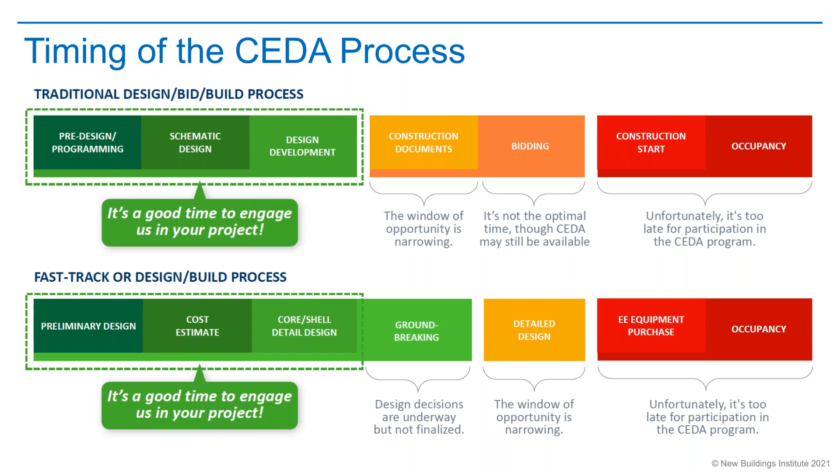The process, we've made this in conjunction with the utilities a very simple process. The enrollment is an online application. You fill out some particulars about your project. It takes maybe 5 to 10 minutes to submit an application. We'll review the data, we'll review the building characteristics, and once we have all that data, we'll get it approved for the program. Once approved, we're going to assign a project manager who will reach out and start step number 2.

That's a preliminary analysis. And during this first meeting, which is roughly an hour and a half long, we're going to do some real-time evaluation of different measures and what we call bundle selections. Basically, the potential for whole building strategies for further analysis. So we'll start that process of evaluating what measures we should consider. Then we'll move to the third step. Again, another hour and a half long meeting.

During this process is where we're going to make final decisions, determine strategies that best align with your goals. Projected energy savings, and of course the utility incentive, will all be determined at this final analysis, and then this is what the project will in fact design to.

After step 3, from an owner or owner-developer standpoint, architect even, we pretty much go into construction, and then our team will come in after occupancy and do a verification just to confirm that what was planned was in fact installed into the project, and then we'll report that back to the utility, and then the incentive will be issued for strategies that were implemented. So it's really a very simple process.

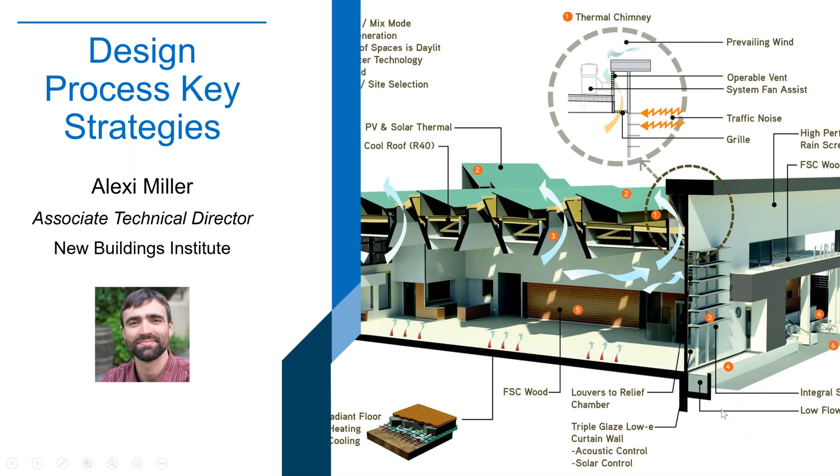All right, so I would like to give you a little overview of some of the key strategies that we at New Buildings Institute and our partners have found to be particularly important over the years. We've been looking at zero net energy buildings or other high performance building types, as well as a wide variety of other buildings, from very high performance like zero net energy all the way down to much more straightforward buildings, some that in fact don't do any energy modeling at all, and have found that there's a couple points in the design process that are leverage points. And we found actually energy modeling is a really powerful tool for improving building energy performance. And there are some basics on making sure that potential is realized.

So a couple of the key benefits: one is getting a holistic representation of building energy use. So thinking about where energy goes in the building and what you get out of that building. And basically doing the energy modeling, especially if done early, like Jeff mentioned, never too early, right? There is, of course, too crazy early to do energy modeling. That is such a thing, like what is the building we're going to build? We have no idea. But pretty early in the game, you can start getting some ideas about what kind of systems you might put in.

And you can start thinking about where the building goes on the site, massing, maybe HVAC type selections. It can help inform some pretty early stage decisions that then allow you to make more informed decisions about the more detailed pieces, the fine tuning farther down the road. And the point overall is to keep the energy costs, the operational energy usage in terms of cost, and the impacts in terms of things like greenhouse gases minimized over the life of the building.

So when we talk about using energy modeling as a design tool, we've thought of there being a few kind of early stages in the project. A couple of things we've found to be really important at these particular stages. One, right at the beginning, is setting an energy target, and often that's something like an EUI, an energy use intensity, kBTU per square foot, in the documents like the owner's project requirements. That target then can help inform the energy modeling. And by the way, we have lots of good EUI targets available, zero energy and otherwise, for both new and existing buildings. So if you're wondering what that might be, we have resources on that.

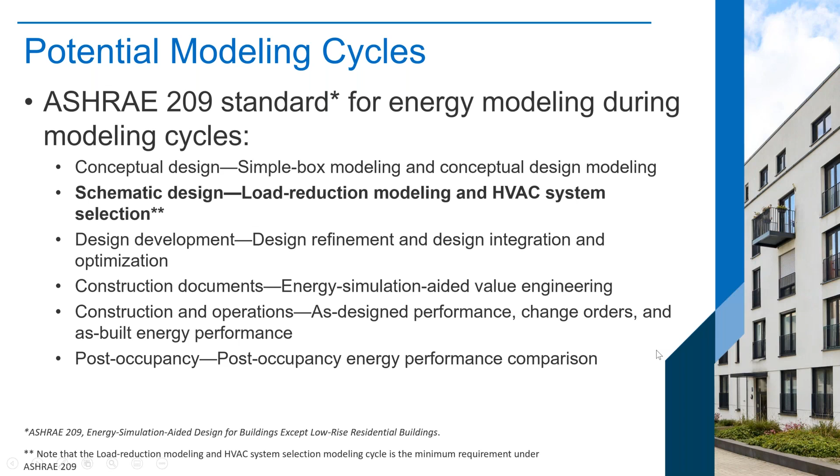And then of course, you build the building, confirm, and are eligible for the incentives coming down the road. There are several standards. ASHRAE 209 is a pretty good standard for energy modeling. It's quite detailed. If you're going through the CEDA program and you're trying to use this complementary energy modeling, you may not need to know all the details of ASHRAE 209, but I wanted to throw it in here to show that you've got several components of that standard that talk about the use cases or the applications of modeling throughout. But there's a lot on there, and I'm not going to read that whole slide.

I mentioned setting targets early in the project. So whether that is in energy usage as an EUI target, or whether that's an emissions target denominated in greenhouse gas, either way, it's quite important to set that target early. And we've found a lot of projects have been able to achieve high performance, zero net energy, or just generally significantly better performance, in part because they set a target early and they got buy-in from key team members and kind of stuck to that target. And then there's also the potential to think about system level targets for efficiency at the component level or at the end use level.

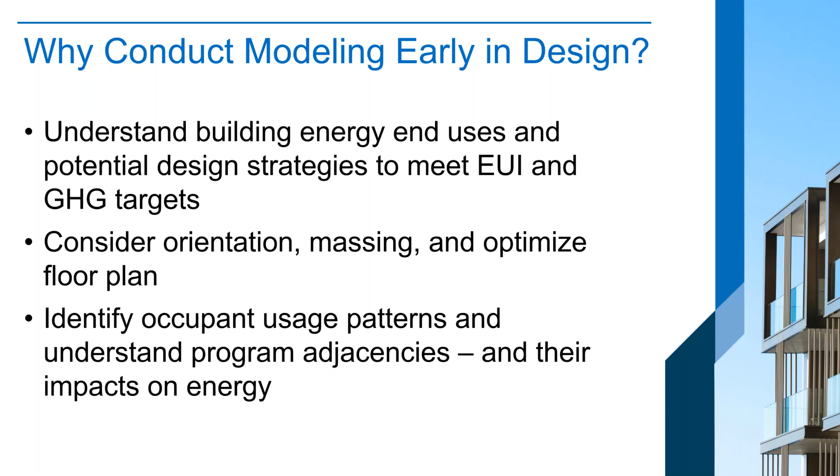Having conducted those, then you can do this energy modeling, and doing it early in design. I mentioned this at the beginning, but you can think about things like orientation of the building, the massing, try to optimize that floor plan, and then think about things like adjacencies. So is there a corridor next to a use space, and are there energy flows between those two areas? Is there a key energy consideration related to how you're laying out the building? And then is there some impact from that on what you're putting in the building, whether that's mechanical systems or envelope? Some of the answers to those questions can start to shake out from even some of this preliminary early modeling.

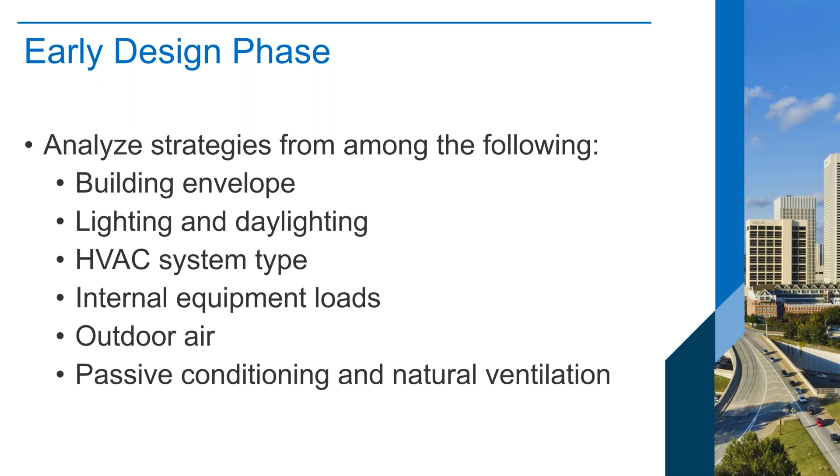Some of the strategies that we've found are important to think about are listed here. I'm not going to read all of them, but I want to note that these include what you might call passive and active strategies. Passive stuff like insulation or natural ventilation, active strategies like things with motors, right? HVAC, pumps, lights, controls. So those can be considered and compared baseline to proposed, as well as compared among each other in a holistic sense. That's part of the game of this holistic energy modeling idea, to be able to think about the contribution that each of those components makes to the overall performance of the building and its energy use. And then we've got ongoing design.

Let's think about those packages that were thrown out there, choose specific measures or final packages, and do that fine tuning. Often teams do iterative energy modeling to really get this stuff nailed down. And then of course it can help inform the handoff for the building operator.

So we have some idea how all the pieces are supposed to run, and that helps make sure that the building actually can live up to its potential. We modeled a great building, now let's operate it and get a great building, operate it as it should be done. And finally, within this program and in general, there's a final step of verification, and of course on to the incentive. And I think we're skipping that today.

So Connie, if you have it, Farah, our guest presenter today, Farah had a project emergency and she is on site putting out metaphorical fires. So she pre-recorded this little chat for us.

Hello, my name is Farah Fazaneh. I'm the Director of Facility Planning, Emergency Management, and Construction at San Bernardino Community College District. At San Bernardino Community College District, we have established a set of goals that include zero net energy buildings, LEED Gold or higher certification, as well as low EUI targets. We currently have a lot of construction activities happening in the district with upwards of 15 new construction or major renovation projects in the pipeline.

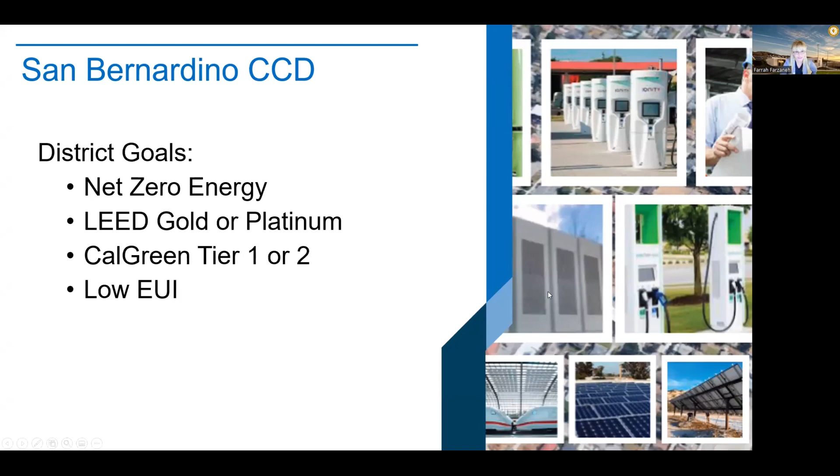We want to ensure that our buildings are planned and ready for the future. Energy modeling plays an important role in this effort. Remember the old saying, if you don't measure it, you can't manage it. Therefore, we don't want to see energy modeling used only as a check mark. We actually ensure that a lot of our decisions are driven by the information collected through the energy model simulations.

It allows architects to virtually experiment and evaluate different scenarios to allow us to weigh the benefits of different options. It allows us to take a measured risk by providing us information about energy efficiency measures that are not yet widely adopted. To name a few recent examples, we have decided to implement solar chimney, solar glass, DC-DC distribution, and phase change material for our technical buildings. So remember, energy modeling allows us to push the envelope with little to no risk. So take advantage of this great tool. Thank you.

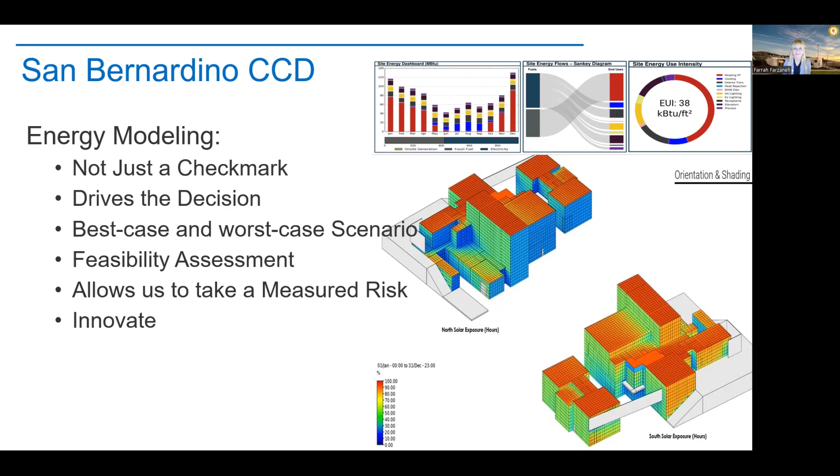Great, thank you. Thanks, Farrah in absentia. I believe she's going to be able to join for the Q&A, assuming that the fires are not raging metaphorically at her project site right now. Now we're going to hear from Neil, who is an expert modeler and runs Redcar Analytics. Neil? Yeah. Can you hear me? We got you. I think, let's see if I can move our slides along here.

So, hi everyone, my name is Neil Bolger. For those of you that don't know me, I've been in the realm of energy modeling and design consulting for a little over 12 years now. And today I'm going to just try and share briefly a few touch points on how we have worked doing building design enhancements with energy modeling, and where I can provide my experience and maybe some ideas that can inspire others as they're working with teams, or even if you are on the owner's side, how you might best work with an energy modeler and your whole design team.

So in the theme of today's meeting, I really focused on thinking about the value an energy model can bring to a design in the perspective of what different teams might be focused on. You know, all teams might be focused on a low energy building. That is a goal we all share. And I think the success I've had is to think about clients and realize that while everyone wants the best building under the sun, and everyone has the same general list of maybe 15 goals, some goals kind of float to the top based on who those clients are.

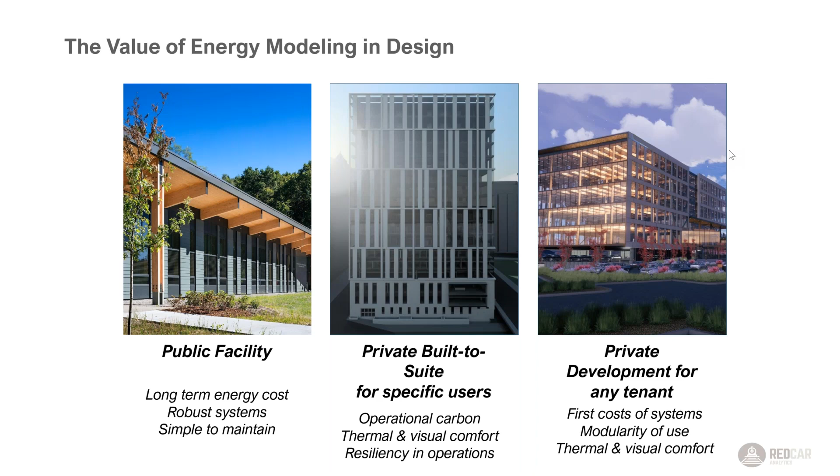And I think being aware of those goals can really help an energy modeler be successful to sort of pull the right information out of an energy model for a team to make informed choices in ways that we know they're already having conversations together. So I was just going to share a few examples of this, and sort of before I dive into that, kind of speaking to the challenge of energy modeling.

You know, from early design all the way to making the building, we're surrounded by lots and lots of ideas, and there's this struggle of how do we analyze all the ideas that are being thrown at us? Like, what is even the right approach? And I need to build an energy model, but which energy model? And does it need to be an energy model? Are they asking me questions that might be around daylight or comfort? And I might need a different model.

So an idea I always preach is to really think about the deliverable, and even think about what is it we need to answer first, and really figure out, is there a meeting that's in 3 days and I need to help answer a question, or do we need to come up with something in 2 weeks? And letting that flow all the way through, really setting the tone for, well, what is the model I'm building? How accurate does it need to be? How much information am I being asked to bring to the table? Do they want a 20-page explanation of what I'm doing? Do they want 5 words about what the EUI is?

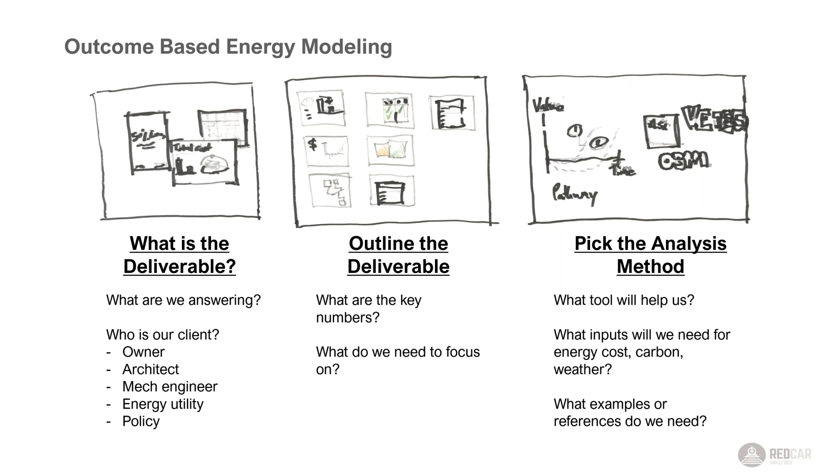And for us, that's really been our way to then say, great, well, at this instance in the project's design, this is the analysis method we're going to use. Or maybe we decide on this instance, we're going to make a few simple models before we dive into the full building, because they haven't even figured out the massing yet.

So, taking that into consideration, there's lots of tools out here. People can use these tools. I've just thrown a few on the page. Some of these tools are more optimized for different stages of a design. You could use them in any stage, but sometimes even switching between tools, as crazy as it can feel, if done the right way and really thinking with the design team's best motivations in mind, can be a way to actually be successful in helping clients really, at the end of the day, understand what's the relationship between how they're designing the building and what it's going to use in energy and feel, and being that sort of building translator.

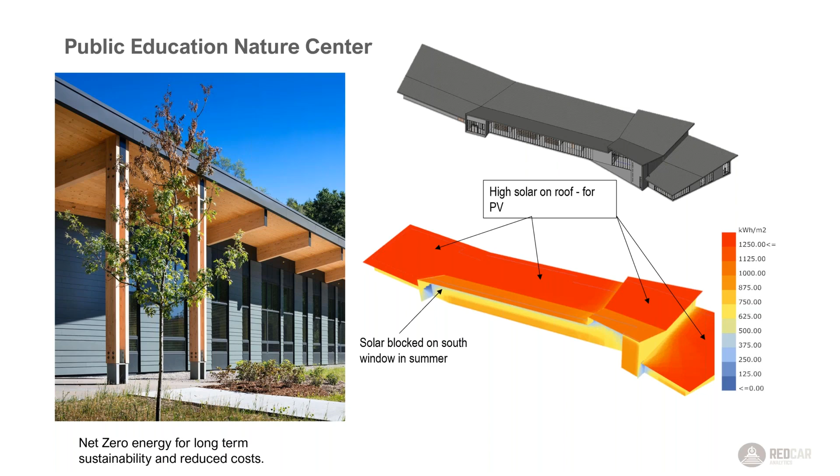So some examples I'm just going to share. This is my public building. This is a public education nature center. It was a really beautiful little building that was going to be these indoor-outdoor classrooms, and for them, they really wanted to hit net zero energy, really make a building that was robust, easy to operate for the staff that were going to be there. So from day one, they wanted to set a goal for solar generation and how can we position that building to maximize output.

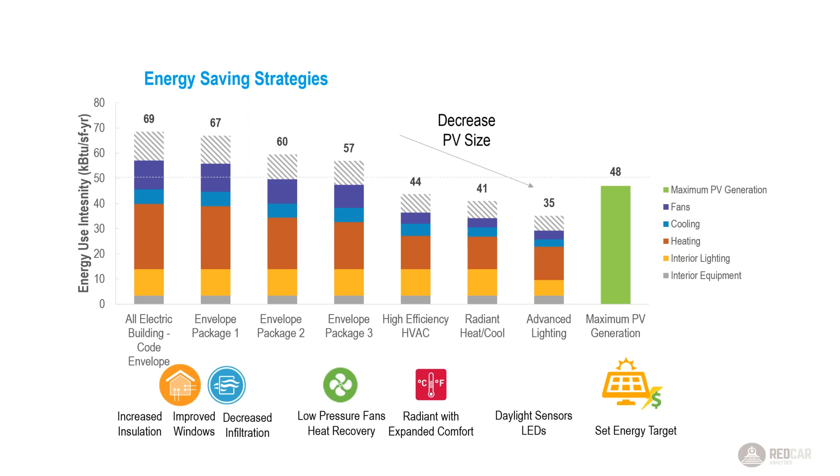The other fun challenge there, it was in a climate that snows, so the solar output wasn't the most, and it also gets very cold. So a big piece that we even helped do, and this was actually with a shoebox tool that's online, was helping them figure out that, while we might want to buy really high performance windows to bring the energy down, it will also make the building more comfortable and less drafty when you have a classroom with students sitting next to the glass or pretty close to the glass. You can really have an impact.

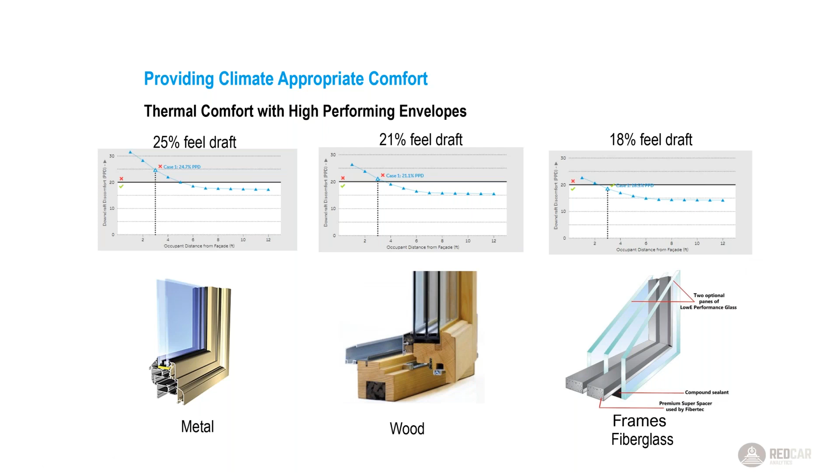My other example on a core and shell office building: for this project, again, we have an EUI target we're really focused on, but here we dove into the fact that at the stage we were pulled in at, we really wanted to help express that improvements to the envelope could also mean improvements to usable space in the building. And while the building may have a certain aesthetic goal in mind, there's these glare risks and comfort risks where too much glass can actually inhibit how flexible part of the floor might be.

And while that might end up being where we want to be in a building, we also just want to go into things eyes wide open, right? If a client wanted to move into this building and put people all the way up against the west facade, how challenging is that going to be? And if we make that more comfortable, how can that give them that other goal they might have, flexibility in the building they're creating.

So kind of using both, right? Knowing an EUI target, knowing we have to get there, but then knowing people don't always just think in bar charts and need to be able to relate to the model in other ways. For this project, we also focused on bringing pictures and examples from other buildings so they could understand how other projects that did decide to do more glass, for instance, created a buffer space, created a corridor, which is a great way to go in a building if you have the flexibility to do that.

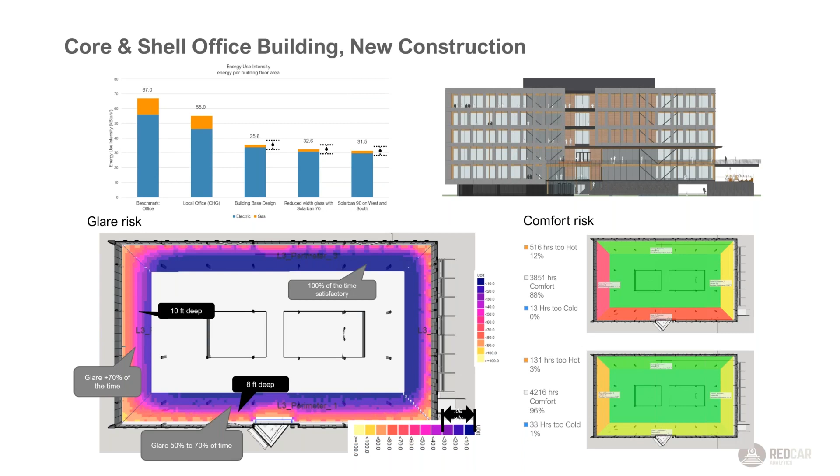So a lot of times we'll try and couple an energy modeling analysis, a visual chart, with real pictures of how that would look in reality as a way to better translate what we're talking about to clients. The last example on this core and shell building I'll throw in there is speaking to the value of an energy model; it can pull out a lot of great information.

And early on, we realized that our model is one of the only things in the design team that can look at peak loads, air conditioning loads on a certain side of the building, and really working with the engineer to say, well, this is what the model says. We know you're going to make a final load calculation perhaps later in the phase, but for choices today, how can we turn that from engineering numbers into things the whole team can understand?

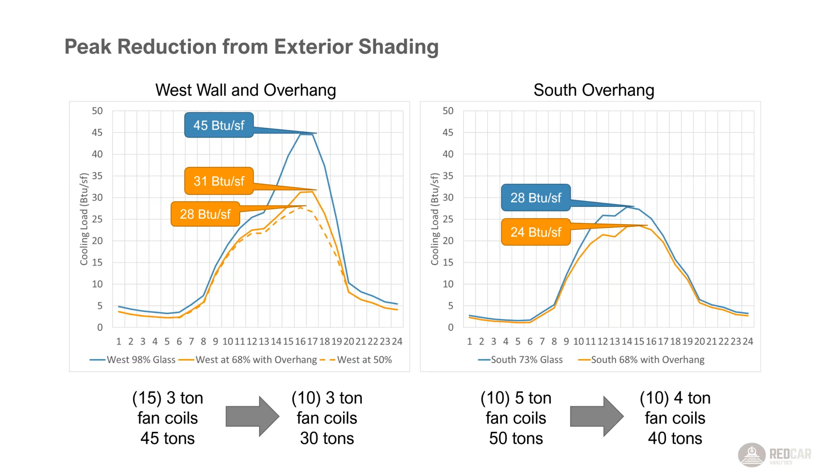So we quickly translated this reduction in glass into how many fan coils we could delete out of the building. If we went from this much glass to this much glass, could we drop 15 tons on the west side? And what does that look like in terms of moving dollars around our design? So again, just trying to take the best value we can out of our simple models to put it into numbers that people can digest and take action with. So lots of uses, but happy to be here.

Thanks, Neil. Pretty cool stuff. Making buildings better in terms of energy and outcomes for the people that sit in those buildings. And now we've got Rich to talk a bit about how CEDA does modeling, what goes in, what comes out, and how that works potentially for your project.

All right, thanks, Alexi. Just a quick introduction for the folks I haven't worked with before. My name is Rich Pesky. I am an energy project manager with Willdan. My background is in architecture. I practiced architecture in the Twin Cities in Minnesota for many years before jumping feet first into the energy field, so I've been with Willdan doing energy work for about 7 years now. I wanted to take a few minutes here, see if I can get the slides to advance. There we go.

All right, so I'm going to take a few minutes to talk about getting the most from energy models, specifically through the CEDA process that Jeff framed up earlier, but a lot of this is going to apply anywhere. And I'll start with why we build models in the first place. Neil and Alexi have already touched on some of this, making sure that the modeling adds value to a project. As long as the inputs are good, there's a lot you can get out of it, and what that is can change depending on what you're looking for.

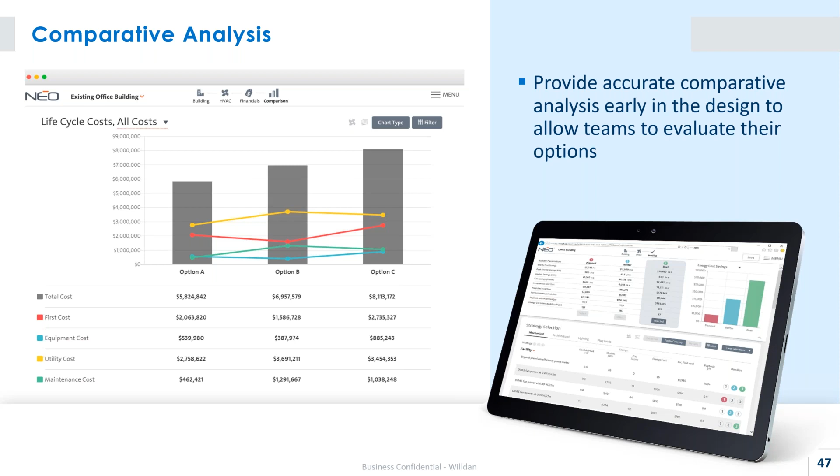We do have to be realistic and consider that if a project is far enough along that there aren't any options on the table, in other words, if the design is fully baked, the utilities and the Public Utilities Commission, they'd weigh that against the goals of the program, again, driving energy savings where they didn't already exist, decarbonization and so on. In the end, CEDA was designed to move projects further than they might have gone otherwise, to incentivize added efficiencies, and not just to reward what would have already happened. And that balance, incentivizing or rewarding, I'm sure I could talk about that for another hour at least, but the key there is whether the program is moving the needle, and projects that still have opportunities to go further can capture some of those incentives.

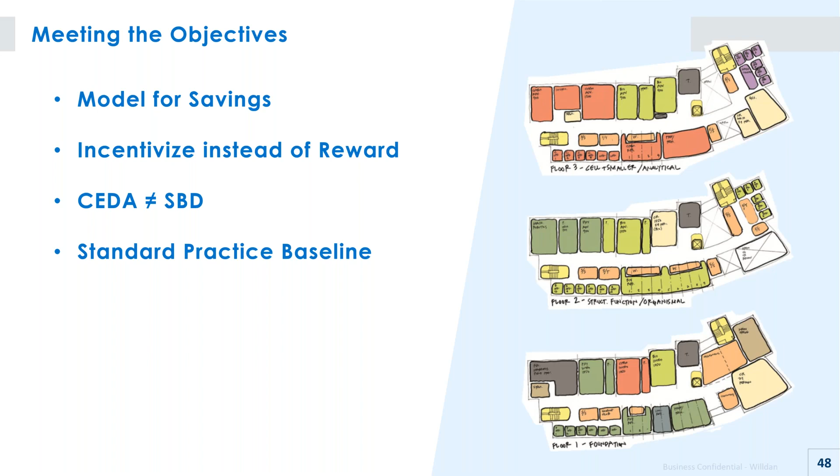So then thinking about the actual savings opportunities, what are we looking at for projects? So we can really take a look at anything under the roof and see where the potential is. Some of the areas where we're seeing increased opportunities and ones that support the goals of electrification are things like heat pump water heating, overall system switches to all electric, like with VRF systems, maybe heat recovery chillers in larger projects. But really, if something in a building uses energy or retains energy, thinking about the envelope here, we can take a look and see whether it fits into the mix.

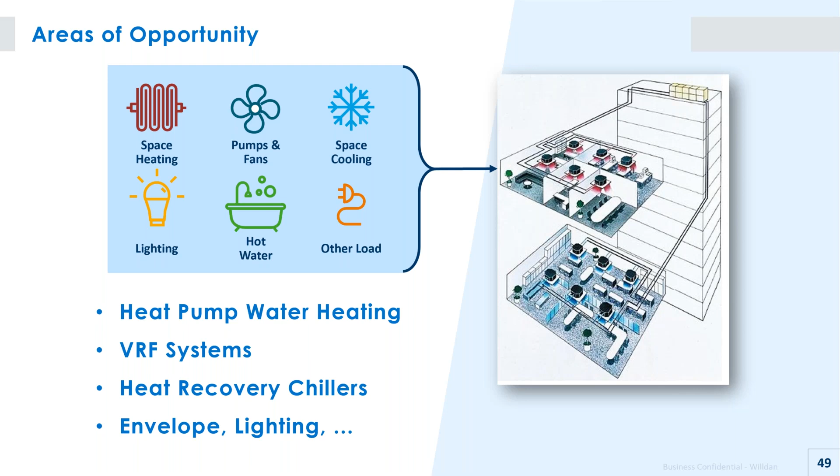So we're talking about a lot of things that happen during the design process, but eventually the project gets built, and we'll want to take a look and see how things shaped up. Of course, recognizing that occasionally something in scope might change along the way. Yeah, that never happens, right? But just in case, after the construction wraps up, we'll review the as-builts and visit the project site to see if anything's changed with any of the planned energy efficiency measures. And with that, we'll true up the energy models and resubmit for final payment of incentives.

Now, with that, there are some cases where projects might be quite atypical, or the systems are highly unique in some way. In those cases, program reviewers may ask for some data logging, and that's to ensure that the claimed savings are aligned with the actual outcome. And that's something that our team will manage where it's needed.

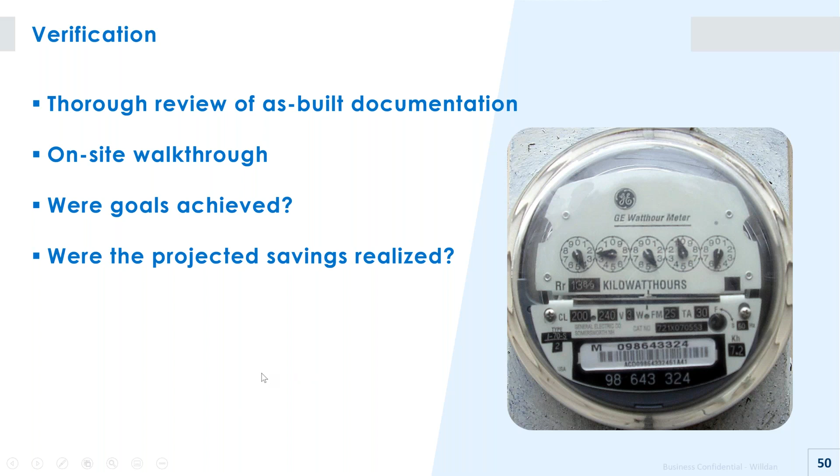Okay, so that's pretty much it, start to finish, and a few thoughts in there about how to approach different options along the way. But as I close out this section, I just wanted to share a few thoughts. With energy modeling, Neil mentioned, is that modeling just to check a box? And we'd like to think of this as not just modeling, but really thinking about this as a larger process of consulting. Again, I'll repeat once more, weigh your options as early as possible, when they're still on the table.

And I did want to say that at every experience level, right? I mean, I'm sure there's a lot of folks on the call here that do their own energy modeling. Maybe there's some that don't, or hire it out, or maybe haven't done much modeling. But at every experience level, we'll try to find a way to leverage the program to help the team out, help drive some additional savings, optimize performance, whatever those goals might be.

And lastly, a challenge that I just like to share anytime I have an audience is model every project. Every one is different. The building that you build and design today might look a lot like one that you just built down the road, but some conditions might be different. And the only way to understand what's really best for each project is to model every project.